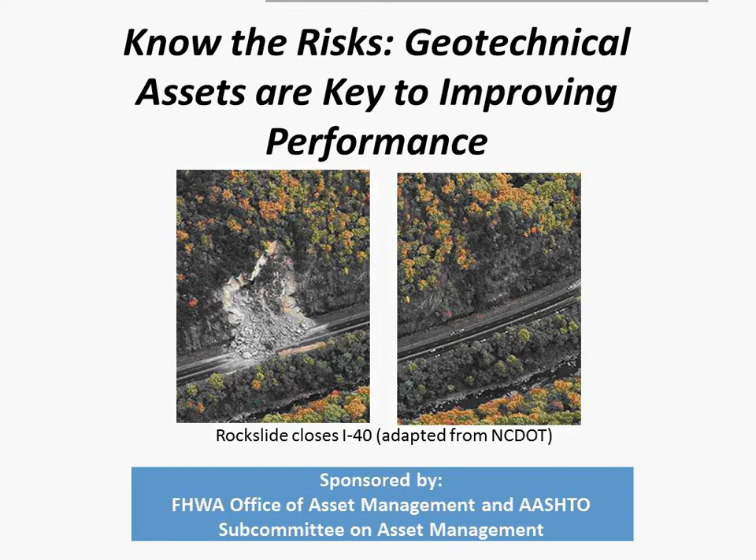This webinar, Know the Risks, Geotechnical Assets are Key to Improving Performance, is the second of two webinars on geotechnical assets and transportation asset management. These are being sponsored by both the FHWA Office of Asset Management, thanks to Steve Gaj, and also AASHTO's Subcommittee on Asset Management, which is chaired by Ananth Prasad. Vice Chair is Tim Henkel, and they're from Florida DOT and Minnesota DOT, respectively.

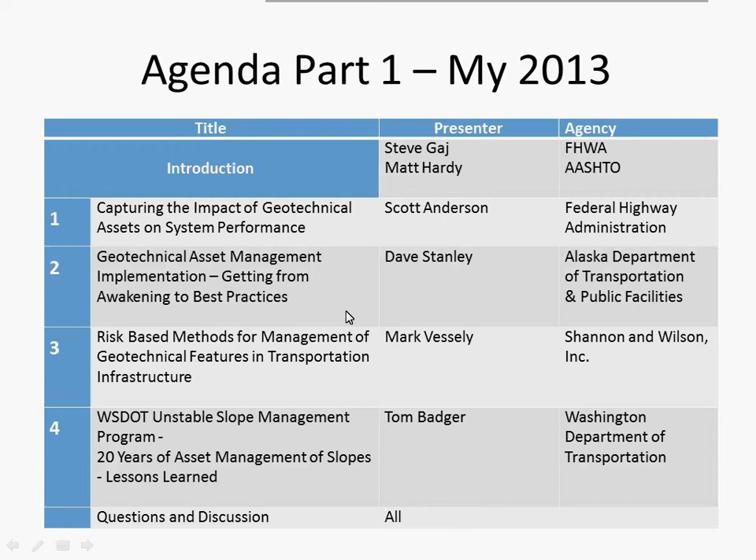So today, this is part two. We have a lot more presentations to go through today. Scott Richrath from Colorado DOT is going to provide some introductory remarks, and then Ty Ortiz, also from CDOT, is going to talk about their rockfall management system. Matt DeMarco from the FHWA Central Federal Lands has a couple presentations. Don Turner from Oregon DOT, and then Jim Higbee from Utah DOT, and we'll round it out with Ken Fishman from McMahon and Mann. So these are the about 6 or 7 presentations that we're going to go over today.

The learning objectives for this two-part webinar series: one, develop an understanding of the role of geotechnical assets in the performance of transportation systems. Learn how to consider risk and implement asset plans designed to improve performance. Listen to case study presenters share their experiences with programs for rock, soil slopes, and retaining walls, and learn what others have accomplished. And finally, learn what state DOTs and federal agencies are doing to manage their geotechnical assets.

One of the focuses of the Subcommittee on Asset Management here at AASHTO, and I think FHWA as well, is to get beyond just what we consider asset management as pavements and bridges; there are many other assets that we have to consider as well. Safety, your ITS, your technology, signs, pavement markings, all those great things. And geotechnical is another one of those asset classes that we have to consider.

we'll see a map that shows all of our rockfall sites statewide, and there's over 750 of these things that we evaluate, that we look at. And since 1996, we have mitigated only about 70 of these through our rockfall program funding. There have been other sites mitigated, perhaps as corridor or other projects that have come along for highway improvements, but specifically to rockfall, it's only been about 70 sites.

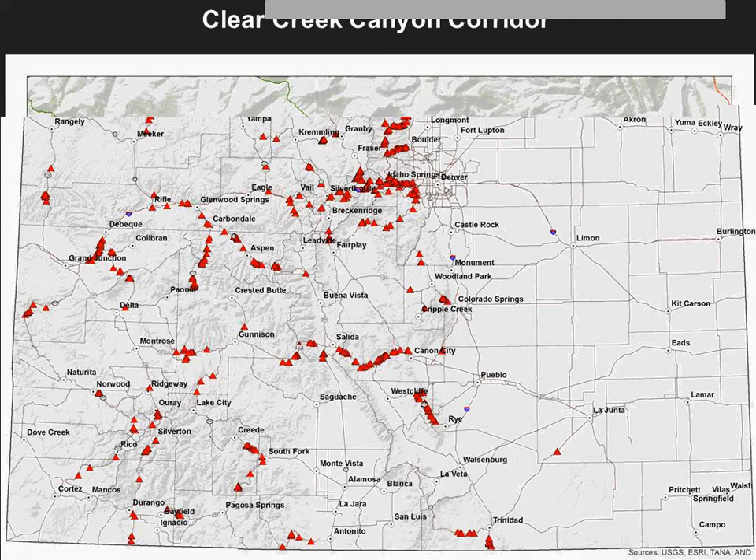And our goal here, though, was to reduce rockfall on a statewide basis, right? So obviously we've mitigated or reduced rockfall risk at that one particular site, but on a statewide basis, it didn't seem like we were very effective. And so I think the next slide gives a good example of that. This is what we would refer to as the Clear Creek Canyon Corridor. It's a corridor from Denver to one of our nearby mountain towns, Black Hawk and Central City. And there are about 50-plus sites in this location. So a good percentage of our rockfall sites are within this area.

Well, if you go to the next slide. Oh, back one. So since 1996, we've only mitigated 12 of these sites. The green dots indicate sites that have been mitigated. So just visually, you can see that over that 18 years or so, just a small portion of sites, even in this really heavily traveled corridor, have been mitigated.

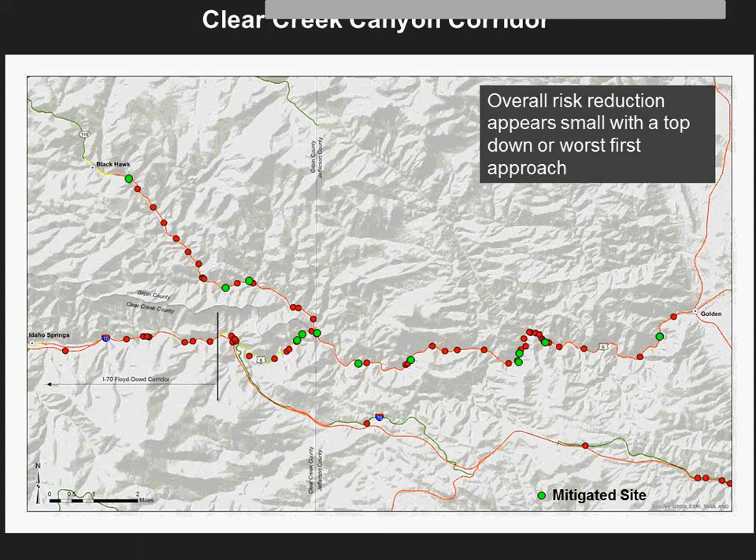And so it seemed clear that we wanted to try another approach, because we've all seen the issues that can happen when we have rockfall events. And so what we decided to do was put together a rockfall management plan rather than just a simple site-by-site rockfall mitigation plan. And so if we go to the next slide, when we put together this management plan, we put together kind of a makeshift mission, so to speak. And this was to help us stay on track, stay on goal with what we wanted to do with our plan.

And our goals were really to reduce risk on a statewide basis. And because rockfall isn't considered an asset, right? It's a hazard, but that hazard really affects the assets associated with the highway that help us to get from point A to point B. But to do that, we needed to be able to measure what we were doing. We needed to be able to measure the performance of rockfall.

And we hadn't really thought about that before. We'd gone and mitigated, but we really hadn't measured anything, partially because we didn't feel that we had data, and we had never done it before. We didn't really know how to go about measuring performance. And so go to the next slide.

What we ended up with is a rockfall management plan that really addresses three things that we do within the Colorado Rockfall program. And the primary function for us right now is to reduce risk. And once again, I'm going to keep on going back to reducing risk statewide, because that's our goal, is to reduce the rockfall risk on a statewide basis.

The other thing that we do is, as we get more and more mitigation performed, we have more and more devices that we need to manage. We need to replace fences. We need to replace barrier along the highway. We need to replace netting. And in some cases, we need to update that netting.

So to reduce the risk, and that's what we're really going to concentrate on, we wanted to take a corridor approach. We felt that if we could mitigate an entire corridor of rockfall, that would provide us a larger statewide risk reduction for rockfall. But with the same understanding that not all of our sites that have a high risk are going to fit into a corridor approach. So we wanted a method that would allow us to consider sites that were outside of corridors also.

And for those of you on the webinar, if you've not seen this photo before, there was nobody hurt here. This car was not occupied at the time that this rock fell on top of it. This particular road is pretty heavily traveled.

Yeah, I can. All right, okay. All right, I will get it. And, sorry, I got a little distraction here.

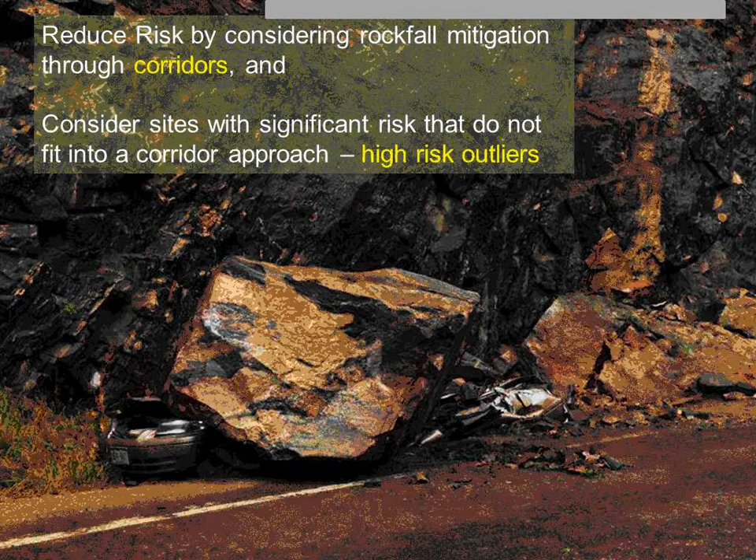But anyway, this person wasn't in this particular car when it happened, but he was parked there. It's a very widely used rock climbing area, and this was a parking location for the climbers. And so traffic, parking, all of that seemed to tell us that maybe this corridor that has a lot of traffic, has a lot of people parked there for recreational use, should be something that we give a high priority to. So if we go to the next slide,

the first thing we needed to do was divide our state into corridors. And what we have found is that within CDOT, we didn't really have a set method to delineate corridors. And so we needed someplace to start. So what we did is we just sat down with this map and we divided the state up into our rockfall sites and just used geography really, combined with our empirical experience of the mobility to get from different locations within the state.

And going back to the traffic scenario, I wanted to show a couple of examples of how traffic comes into play for us when we start to prioritize these corridors. These dots represent different sites, so I'll get to what the different colors mean here in just a minute. But if we go to the next slide, we can see a couple of

examples of traffic corridors. So this is a corridor that only has about 1,400 AADT. So it's a relatively small volume compared to other locations around the state. But this type of event that you see here, based on my experience, probably happens every 2 to 3 years. Clearly, it's a road closing event. If we go to the next slide.

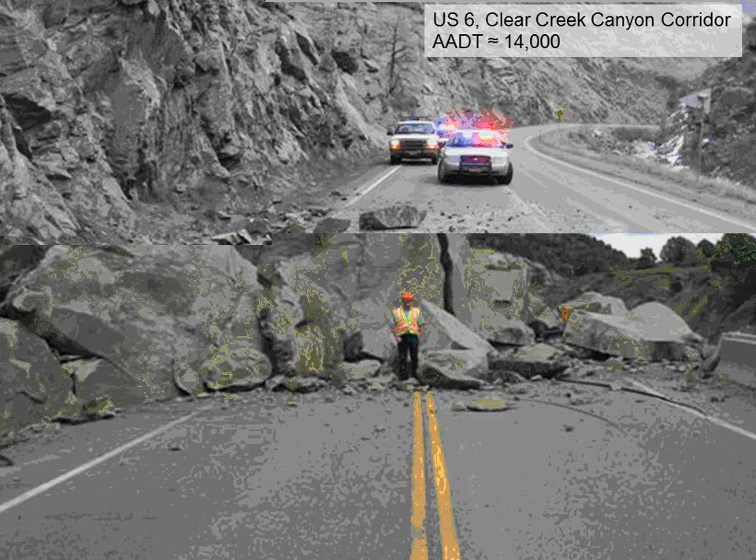So this is that same Clear Creek Canyon corridor, and it has about 10 times the amount of traffic. And so even little incidents like this will close the road just because there's so much traffic. Whenever there's rock on the road, somebody's going to hit it, and there's a bigger chance for a rock to actually land on a vehicle. And so it seems very clear to us that traffic is a big part of trying to prioritize our corridors.

And so the next slide will show the method that we use to prioritize them. We had a two-step phase. You had to make it through step one to even be considered as part of our priority. And that first one was traffic volume. And so we are using traffic as a surrogate of the consequence of rockfall.

And it seemed to make sense, right? Where we have more traffic, there's obviously a bigger consequence to the highway, but there's also a bigger consequence to the surrounding community in terms of getting people and goods and things like that to the different towns.

The second tier in prioritizing a corridor was the likelihood of a car being affected by rockfall. And we're using the term vehicle exposure here. Vehicle exposure is determined by taking data points from a rockfall hazard rating system and combining those. We use AVR, average vehicle risk, which for all intents and purposes is the percentage of time throughout the day that a car is within the rockfall zone or the rockfall hazard for that particular site.

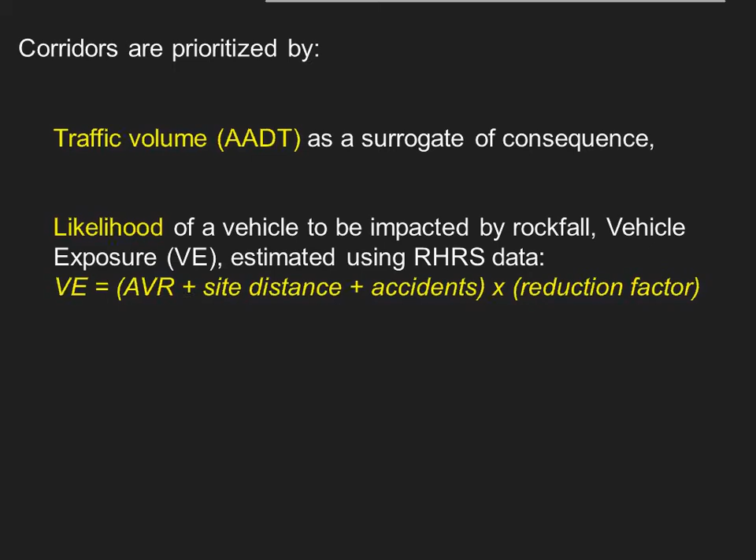So if we have a ditch that is catching 95% of our rocks, then we can reduce this. We can multiply this by 0.05 for a likelihood, because even if rock falls from the slope, the goal is really to keep it off the highway. And so the next slide kind of emphasizes vehicle exposure. What we decided to do is use this vehicle exposure component to measure the performance of rockfall, and to measure the performance of our rockfall mitigation.

So if we go to the next slide. Now that we had a method of prioritizing our rockfall corridors, that's exactly what we did. The dots that you see here, we have traffic. We use high, medium, and low traffic volumes, and high, medium, and low vehicle exposure numbers. The sites delineated with red dots are those sites that have both a high traffic count and a high vehicle exposure.

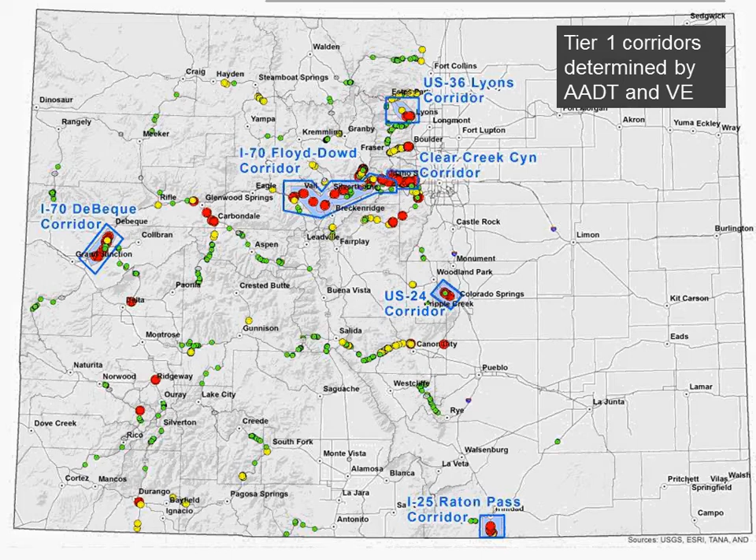And so for us, given the amount of money that we have and the time it's going to take us to work on a corridor, we right now are going with just the red dots for prioritizing our corridors. So if we go to the next slide, what that tells us is that once we have our corridors delineated, and it doesn't really show it very well in this slide, we would really stop looking at sites as individuals, and we would look at corridors as a whole.

And you can see right here our Tier 1 corridors, at least. The corridors of the rest of our state are shown here, at least on my screen, though they're not showing up. They're colored blue. You can kind of see the outline of those corridors. The thinking now is that instead of looking at individual sites, we're going to need to look at an entire corridor. And there's going to be other hazards within that corridor also.

There are going to be landslide areas. There are going to be debris flow areas. There are going to be rock slide areas, obviously rockfall areas. So you might think of this as a geologic hazard zone. And these red Tier 1 corridors are going to be where we start. Well, that still leaves us with our high-risk priorities. So if we go to the next slide.

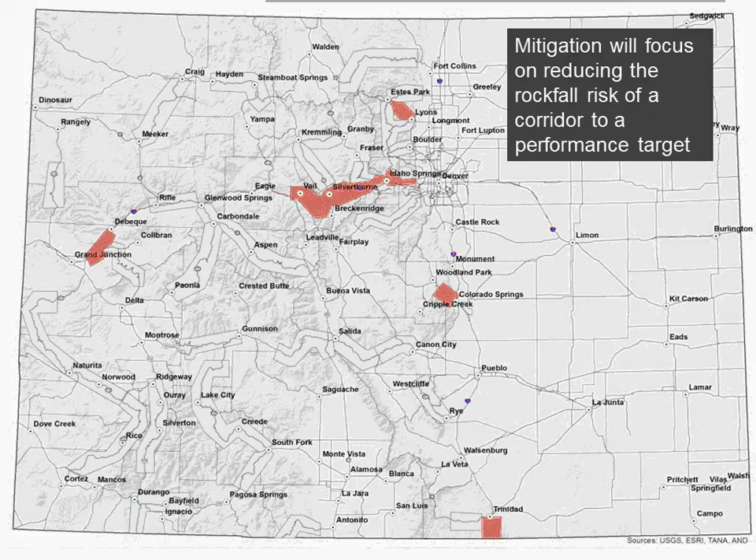Our high-risk priorities are still going to be important to us, because we understand that not everything that probably has a high risk or that we should be paying attention to fits into a Tier 1 corridor. So we're going to use a cost-benefit ratio to prioritize these high-risk sites. Along with mitigating sites through a corridor, we're also going to mitigate high-risk sites that don't fit within that corridor. The benefit will be measured by the amount of vehicle exposure reduction that mitigating one of these high-risk sites presents to the corridor.

Next slide, please. So once we have our sites delineated and we have the existing corridor vehicle exposures determined, at least an average vehicle exposure, our next steps are going to be to enter into feasibility studies for these corridors. One of the concepts that we're going to have is a mitigation confidence factor. What that's going to be is the effectiveness; I'm trying to put a number to the effectiveness of the type of mitigation. And this might be done on a broad basis, like the type of geology, or it could be done on a site-to-site basis, given the type of mitigation scenario that you might see.

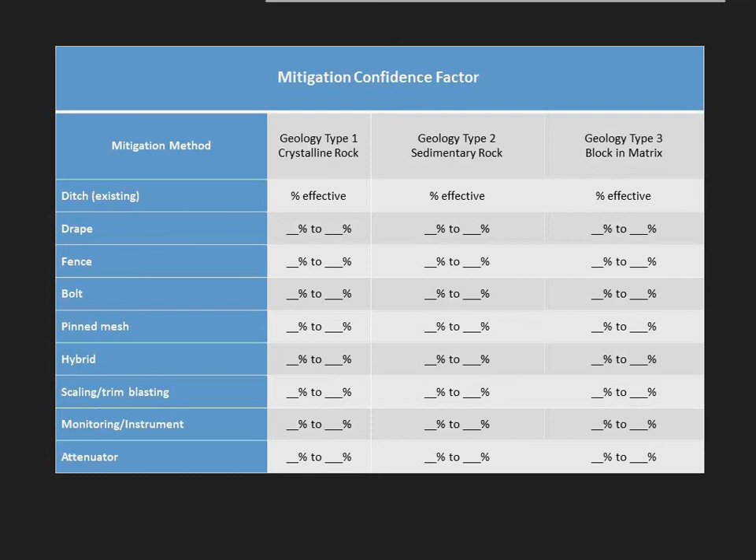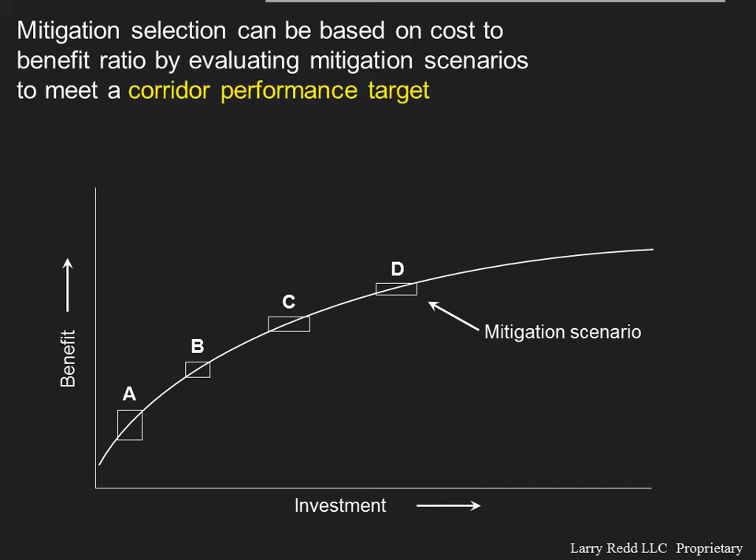So if we go to the next slide, we might start evaluating our mitigation scenarios based on a trade-off, cost-benefit or investment-to-benefit scenario. So we may have A, B, C, and D scenarios for specific sites, or for specific corridors, but the goal is going to be to perform this mitigation to a corridor performance target. Right now we don't have these corridor performance targets because we didn't feel we had enough information to provide them. So we're going to enter into these feasibility studies for our Tier 1 corridors, and at that point we will see what is an achievable performance target for us. And with the next slide, that would be the end of what I have to show for what we're doing in Colorado for rockfall.

All right, can you hear me? Yep.

Okay, this is Matt DeMarco. I head up the Geotechnical section of Central Federal Lands Highway Division of FHWA out of Denver. I'm going to talk about an engineered slope management program that we kicked off at Yosemite National Park back in the summer of 2011. It dovetails very well with what Ty was just talking about and has some elements of his statewide program in a much smaller area, so I think it will align well with what you just heard.

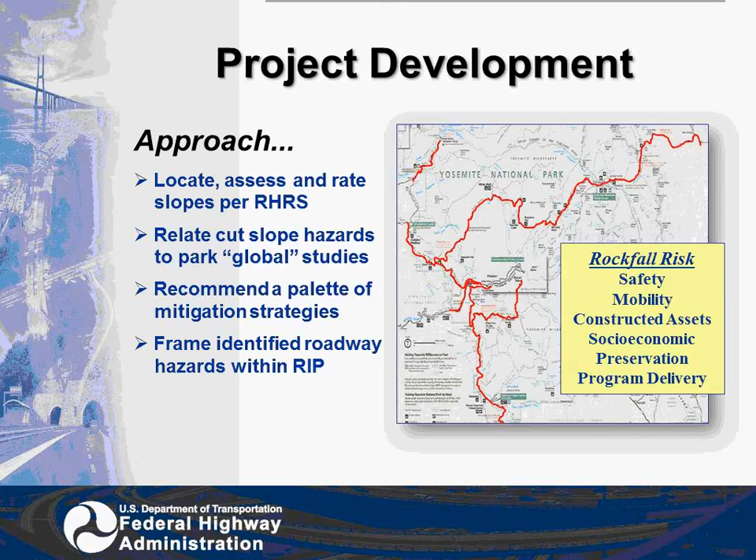Rockfall has been an issue in the park for decades and has been studied by U.S. Geological Surveys well over the last 30 years. In April of last year, the park geologist Greg Stock, along with USGS and others, published a risk assessment for major rockfall that had been occurring in Yosemite Valley. This is an excellent publication, and you can access this very easily by simply Googling Yosemite rockfall, and it'll come up with this document.

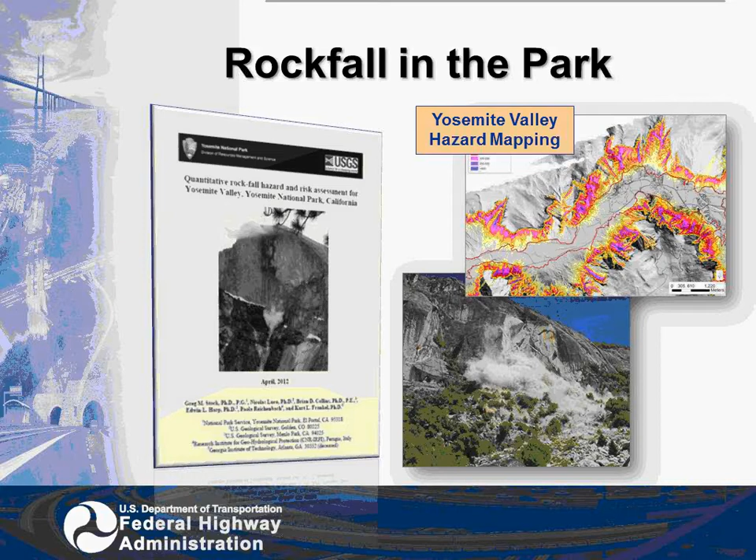In the upper right photo there that shows the plan view aerial, you'll see a thin red line. That was a hazard line or a risk line that was established for the park based on this analysis that is now being used to drive policy on decommissioning some camping areas and actually removing some of the residence headquarters within the park. Next slide.

I should have mentioned, too, that I think it was because of that more global study that's been ongoing within the valley that the park really understood the value of rockfall management and understood where we wanted to go with the engineered slope management program, and so it was an easy sell.

As I mentioned, we use the rockfall hazard rating system as our basis for our work. It's a hazard assessment. It has some risk attributes to it, not a true risk measurement program by any stretch, but easy to apply. It does provide a basis for funding prioritization, though it could be misused in a worst first kind of context, and we'll talk a little bit about that.

Our deployment was pretty traditional with a preliminary screening of over 300 slopes on the park roads. We wound up conducting a rating assessment of 163 of those cuts. And then we followed up some months later with a windshield survey that involved all of the maintenance staff traveling all the roadways. When you're out on the ground collecting this information, you get this snapshot in time of performance, but you don't get a sense of how the cuts are performing seasonally.

And so we just did a very simple 1 through 5, kind of hold up a finger as we drove by, as to how serious a rockfall issue each of these sites were. It lined up very well with the RHRS survey. Next slide, please.

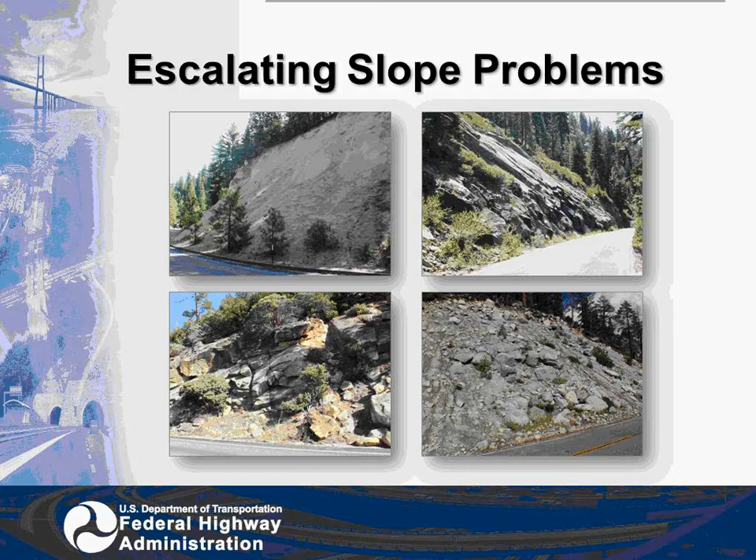So over the course of the work, 163 cuts were rated. We looked at how the ratings were falling out, and just very simply did a quick distribution of the types of remediation actions that needed to be done to each of these slopes. To have a very simple conversation with park engineering and maintenance staff, we broke them into 150 rating point increments, and then classified them low, medium, high, and very high. Again, this aligned very well with the windshield survey. Next slide.

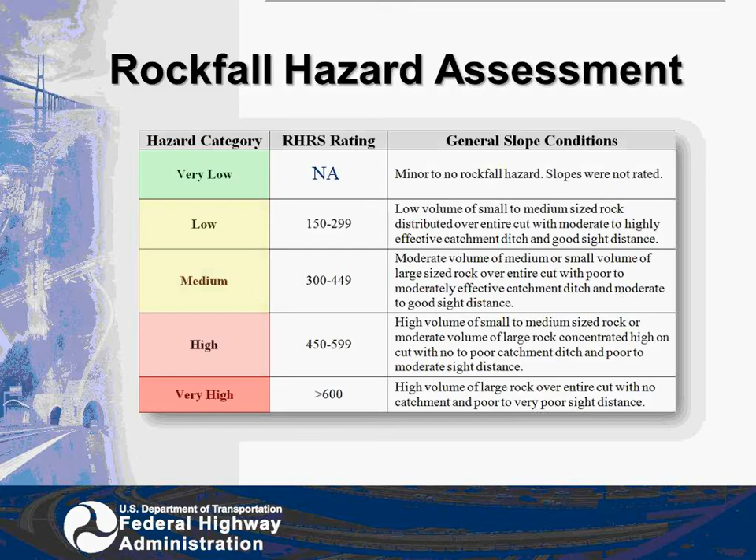You can see the distribution of how those ranked out. The very low were excluded in the original screening, so the 163 ranked from very high to low. 85% of the slopes ranked medium or lower, and we only had 15% that ranked in the high category.

And this would have been where I think traditionally, from a programming standpoint, we would have said, okay, let's go out and start doing the engineering on what appears to be our highest risk, 2%, maybe breaking into that 13% in the high category, and get our out-year funding in place so we can go to work and fix 3 or 4 slopes at a time.

Very similar to what Ty showed on the Clear Creek example with having attacked a handful of the higher risk slopes, a few at a time. The conversation that we wanted to have with the park at this time and pursued was, let's take a look at, and could you go to the next slide, please, is rather than jump to the conclusion of attacking high-risk slopes, what is it that we really want to pursue over the next 5, 10, 20 years?

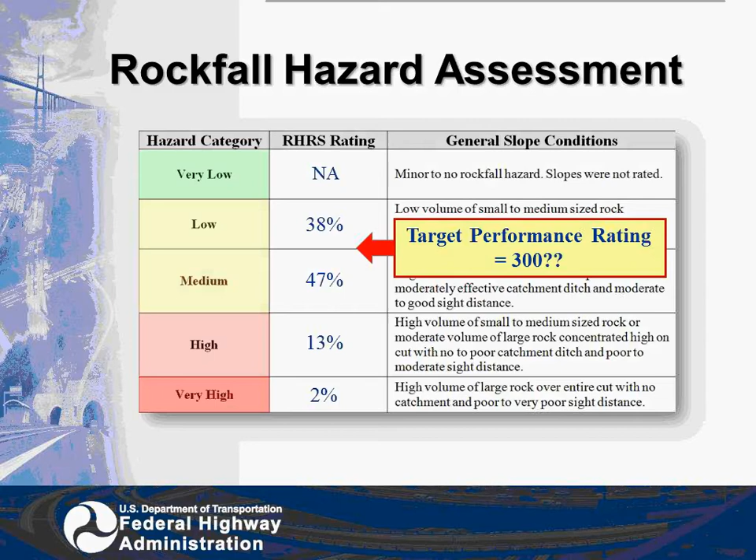And is it possible for us to set some sort of target performance rating for within the park? And when we looked at the maintenance requirements and the mitigation measures, there's kind of a natural break around that 300 RHRS rating. We said, well, is this a good target for us? Can we reach that, giving due consideration to a number of factors? And let's look at the next slide, please.

And some of those considerations have to do with immediate funding. You know, what monies do we have in pocket right now that we can apply to imminent hazards within the park? Where are we going with program funding in the park? We have highway work, roadway work scheduled for the next 9 years in the park. How can we leverage those funds towards a broader program? Is there a cost-benefit consideration that we need to give to treating a larger volume of slopes as opposed to focusing in on some of the larger, higher-risk slopes?

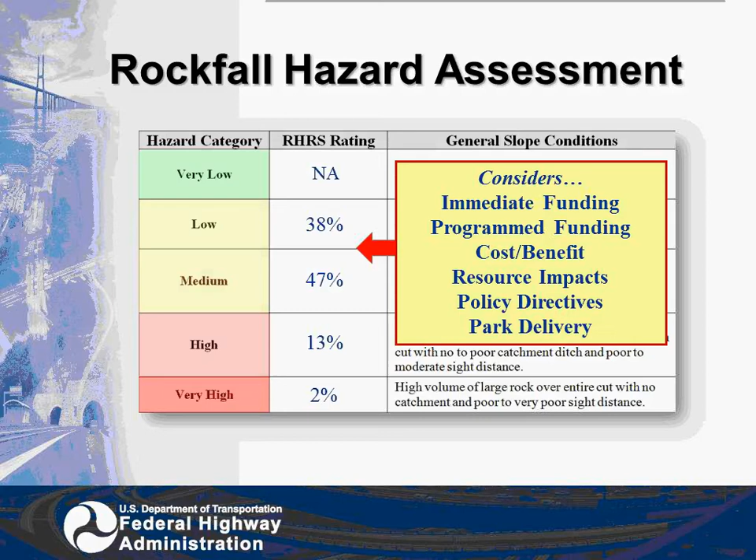And then a couple of issues that the park has to address on resource impacts and policy directives. The park, of course, with the Yosemite Valley issues, has come up with substantial policy regarding rockfall, and so we have to align our work within those policies. And then the bottom one here on park delivery. With sequestration, a number of people have been laid off from the park, and so there was a big push that perhaps the park could deliver some of this work. And so we can go on to the next slide, please.

So we came up with a 3-phase program aimed at addressing those types of considerations. In the first phase, that actually kicked off just this morning in the park, we called hanger removal. And it has to go back to, and again, I think Ty just talked a little bit about going back and looking at the highest risk locations in the state. The question came up in the park that if we wanted to allocate several $100,000 to try to drive medium-rated slopes into the low-rated, where we're treating maybe 80 slopes as opposed to 2 or 3 slopes, are we ignoring imminent hazards and dangers within the park?

And what doesn't come out in the rating system is these sites that have imminent hazards. And so in this particular case, which is on Wawona Road, which is the first road they're starting on this morning, you can see that this slope doesn't really have much of a rockfall hazard related to it outside of this one boulder that's perched up at the top of the hill and is just hung by a tree root.

So we took a step back and said, you know, for a couple $100,000 and putting park staff to work, we can go to a lot of the slopes immediately this year and not have to wait for program funds out here and make a positive impact on safety throughout the park immediately with the skill set that they have. Next slide, please.

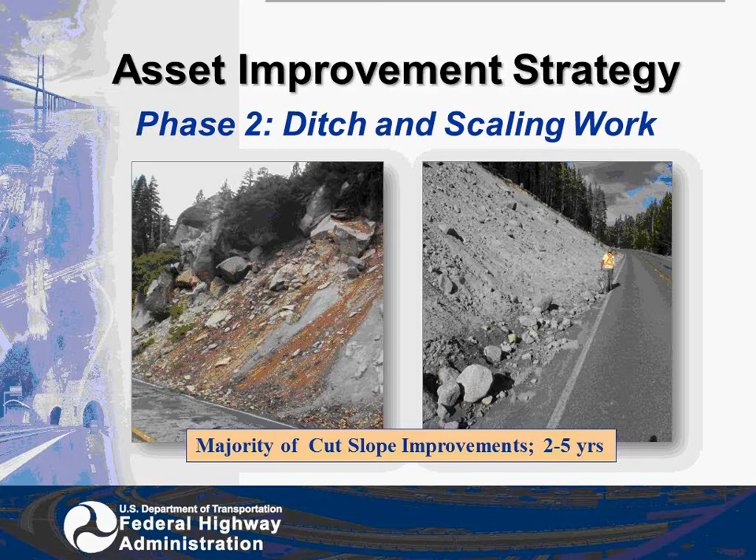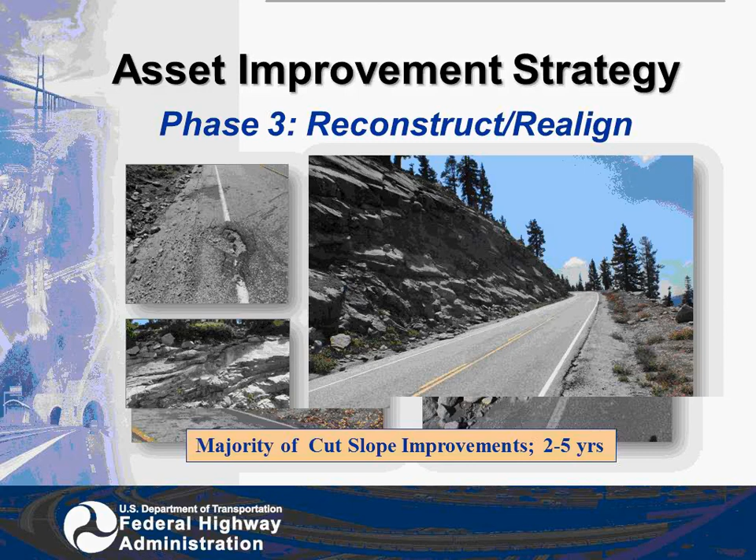And then finally, for the very high-risk slopes, the engineering programming will start later this year, looking at major rehabilitation, reconstruction, realignment of roadways. The large photo that you see here has plenty of room to move this road out onto the shoulder, and this is programmed for 4 years from now. Get us away from having to do any type of rock treatment up here.

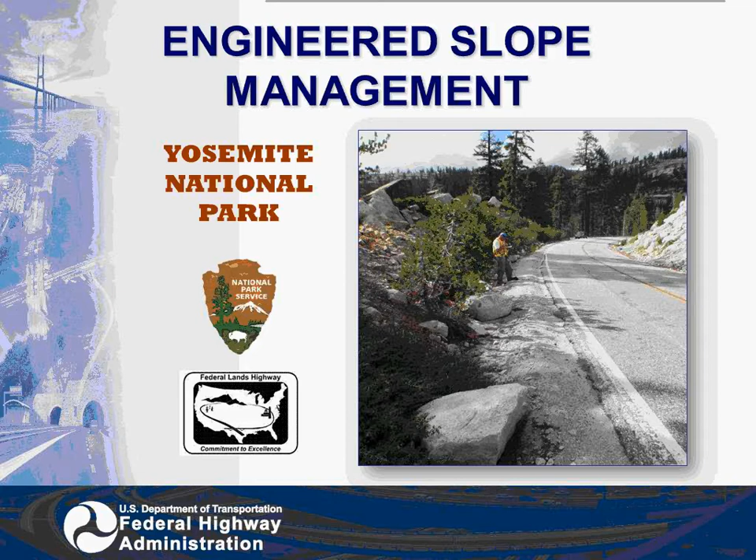Next slide. So in closing, I'll just say that it's pretty rudimentary. A first start at changing a paradigm within the park on managing rock hazards with a proactive approach, and also beginning the first steps of incorporating this subject into their asset management program park-wide.

And I'll just say also that Mark Vessely spoke in May about geotechnical asset management. I think he made reference to the new document that came out of Central Federal Lands on implementation concepts and strategies. And I just would say that this is now available. It's new this year, and some of these same subjects are covered in there as well. And you can Google geotechnical asset management, and this will come right up.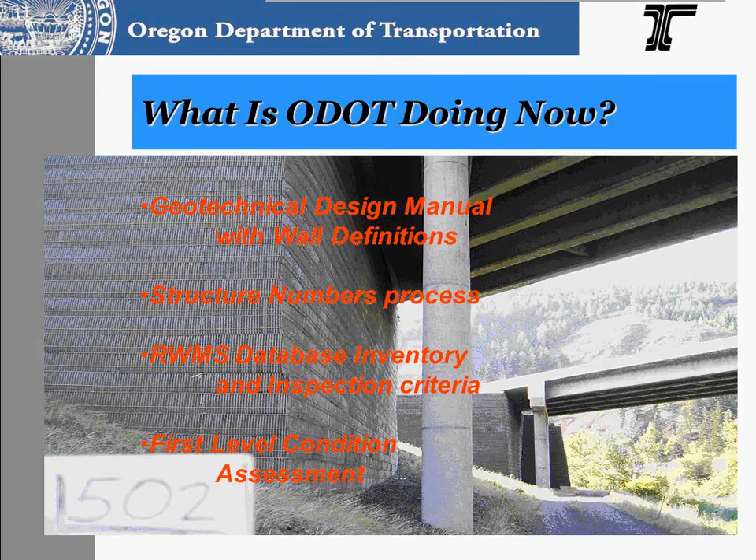We have a retaining wall management system database that we've collected, and we developed the beginnings of an inspection criteria for that and incorporated it into the database. And then, as part of the inspection criteria, we developed a first level condition assessment. So basically looking at the wall, seeing if it's performing as it needs to, and then developing further criteria after that. Next slide, please.

Some of the definitions: we have defined bridge retaining walls, anything that supports a bridge end or is close to the bridge, as opposed to, in this case, a highway retaining wall, which is separated from a bridge and is standalone. They can be MSE, they can be tieback walls, anything else that is standing alone. Next slide, please.

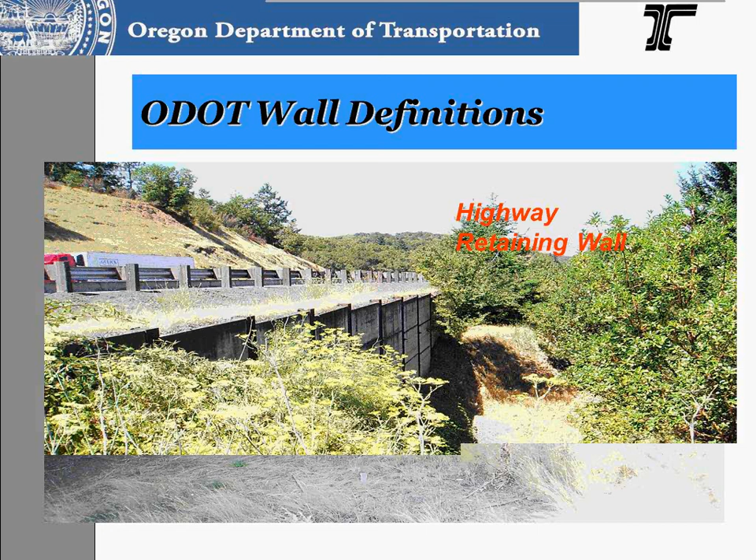Part of our process that we developed was to collect information in the office from existing as-constructed plans, going through each plan set and trying to determine what the intent of the design was at the time. This could go back 50, 60 years, so sometimes it's quite difficult.

Anytime we see a wall in those plan sets, we incorporate it into our database as a database record. We used all that information coming from the plans to get a type, size, and location of the wall. And then we follow that up with a field verification of each wall and try to do a first level condition of that wall. That's an ongoing process we're into right now.

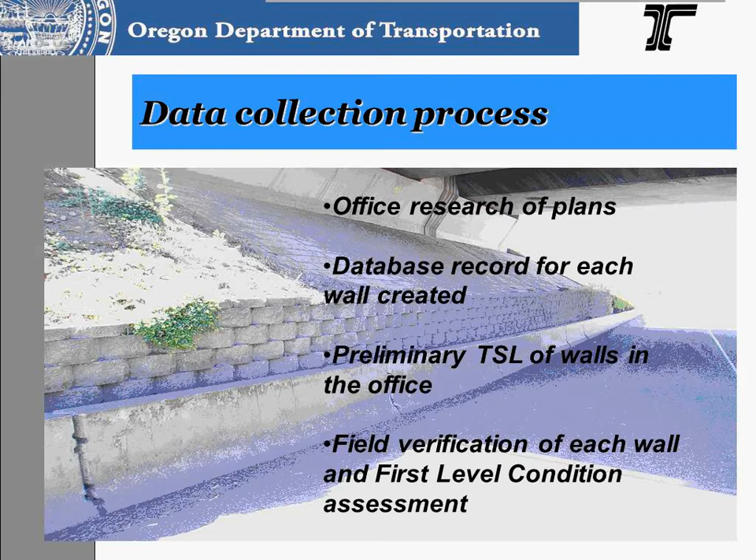Next slide, please. The database itself was developed using the National Bridge Inventory coding field and Pontis data, so that we could tie all of the information directly into our bridge section. Because so many walls are part of the bridge prism, we wanted to make sure that we weren't recreating something separate from our bridge section. We also used the Colorado DOT feasibility paper by Hearn, which used Pontis type information, and then the FHWA circular on earth retaining structures. Next slide, please.

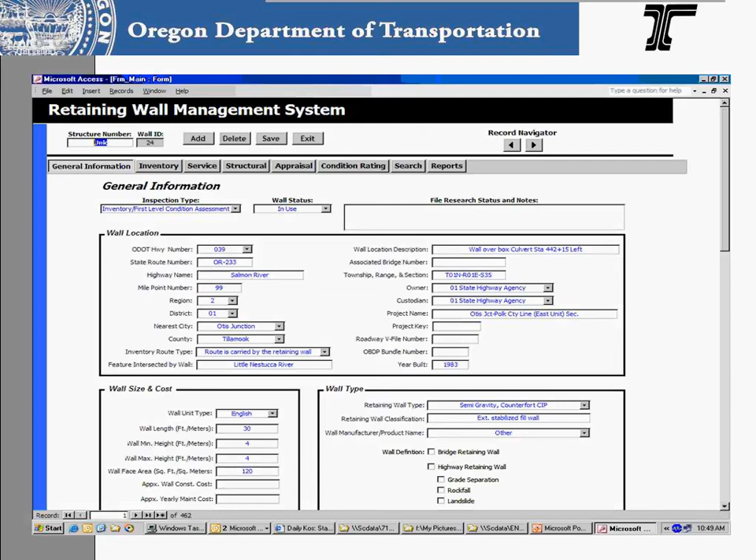This is just a screenshot of our first page of our database. It's probably too small to read, but it just shows that there's a lot of information that you can gain out of a set of plans just to get a type, size, and location. Just basic information, and gives you an idea then of where to get started. Next slide, please.

The condition rating is probably the more difficult thing to do at this point. There's no standard yet on condition ratings for walls, other than what our bridge inspection folks use to inspect bridges and abutments and those kind of things. So what we developed is a simplified version, what we call a total element score.

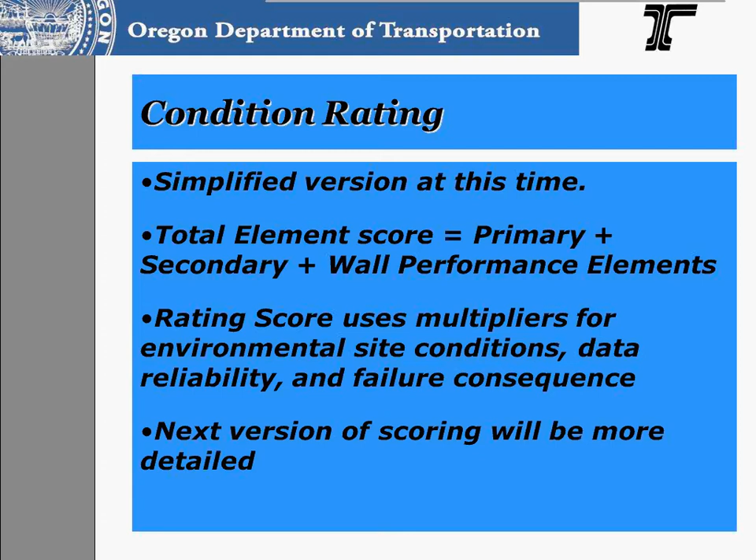We use what we call primary elements, and the primary element of a wall is the face. It's the only thing you can really see of a retaining wall, so that's the primary element. Secondary elements are anything that surrounds the wall. And then we have performance elements. The rating score uses a bunch of multipliers to try and help out how good the data is, and we're planning on improving all this as time goes on. Next slide, please.

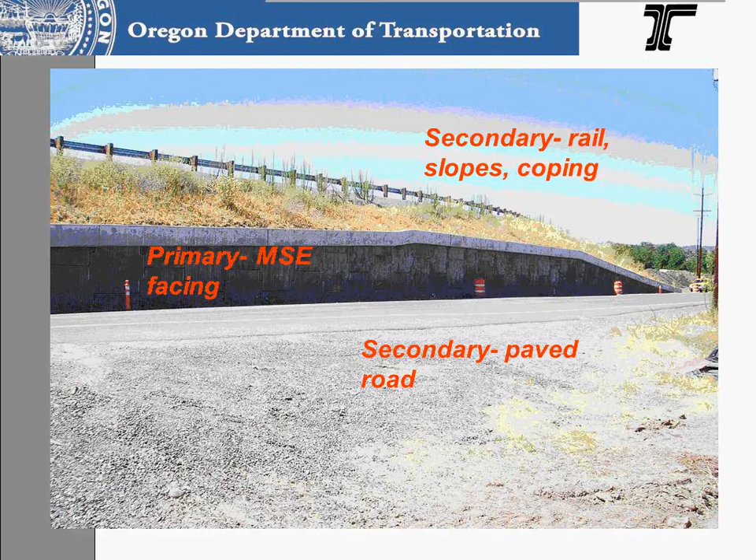We have about 2,100 bridge and highway walls in ODOT. About 60% of the walls we have now constructed are MSE. By that I mean, I don't want to confuse it, walls that are now being built. Years past it was more cantilever. Now most walls are MSE type. About 10% of walls now being built are cantilever. About 70% of all the walls that are built are part of a bridge. And 90% of walls that we have are under 30 feet high.

Next slide. So what have we learned so far? Our design information can be very scattered. We have to go to bridge files. We have to go to our archive as-constructed plans. Sometimes project manager files contain information that isn't in the plans.

Another thing that came up in later years, we started giving contractors the option of several different types of walls to build. So the plans probably didn't show what was actually built. So that means we have to go out in the field and look and see if we can determine what that wall might have been. As-constructed plans, older plans are different from newer plans in how much information was incorporated.

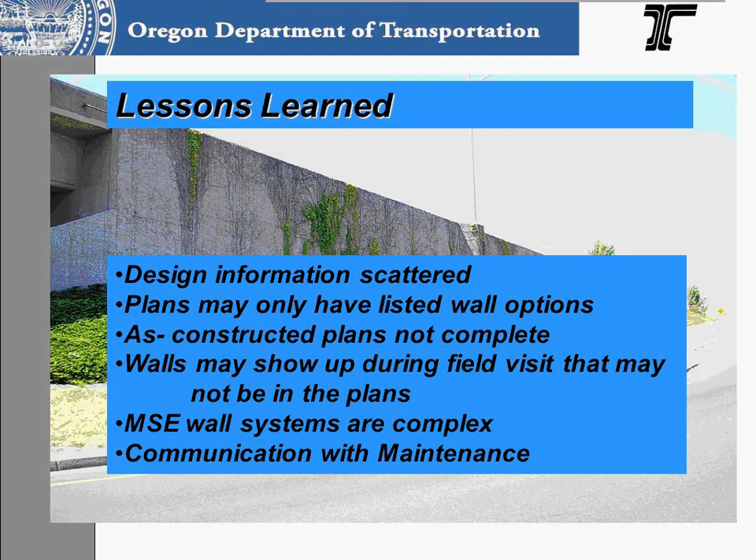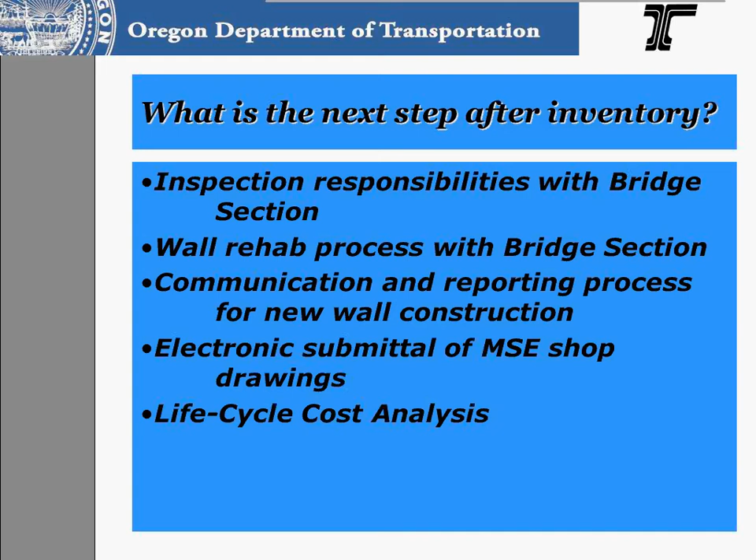What's the next step? We're going to be developing inspection responsibilities with our bridge section to work with our bridge inspectors. We have to develop wall rehab procedures for different types of walls. An MSE wall would require something different than a tieback wall. A communication and reporting process for new wall construction, and some sort of process for electronic submittal of shop drawings. After that, we need to have some sort of a life cycle cost analysis method developed.

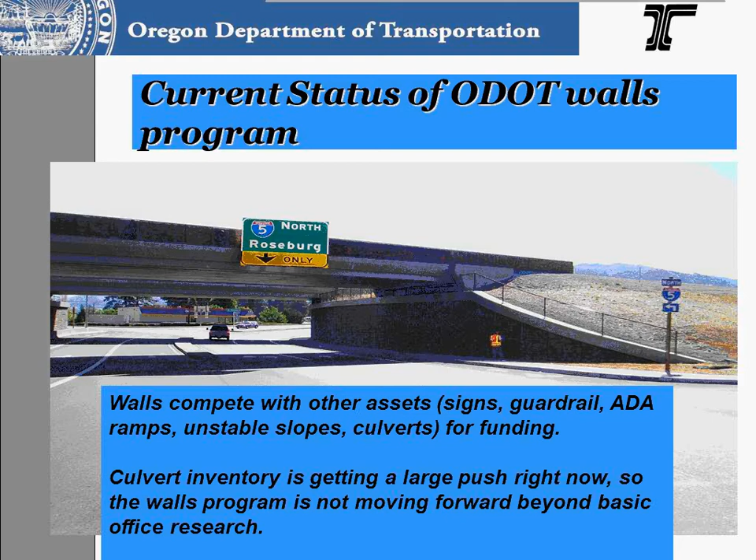Next slide, please. So at present, our wall program competes with other assets, signs, guardrail, ADA ramps, slopes, culverts, for funding. At this point, culvert inventory is getting most of the funding, and so our walls program is moving slowly forward in just trying to develop one piece at a time. And if we can get more funding, we'll work on it in a faster method. And that's all I have.

I'm going to talk about our UDOT retaining wall inventory inspection asset management program, which is still in its infancy for us. In talking with Dave Stanley over the last few years, and with Don here last Friday, I've come to realize that we at UDOT have really had a leg up in terms of our starting point for developing an effective asset management program for our state's retaining walls. This is from two main aspects.

The first being about 15 years ago, our Structures Division adopted a wall numbering system, but like other states that started similar numbering systems years ago, our folks began to assign numbers somewhat haphazardly for things that had nothing to do with retaining walls. After a few years, they refined the process to assign them only to walls, and more recently, they've adopted an efficient email system for project designers to formally request the wall numbers, while giving us more definitive background info on the walls.

The numbering is currently up to about 740, but we certainly have a lot more walls in the state than that. The main reason is that we've generally followed the numbering process that only one wall number is assigned for all the walls of a particular type on a project, or for a project phase where that applies for our larger projects. So, for instance, on the Legacy Parkway project located north of the Salt Lake Valley, which was completed in 2008, there were only 3 wall numbers for all 40-some-odd single-stage MSE walls for each of the 3 project segments, and 2 numbers for the 2-stage walls on the 2 wall segments.

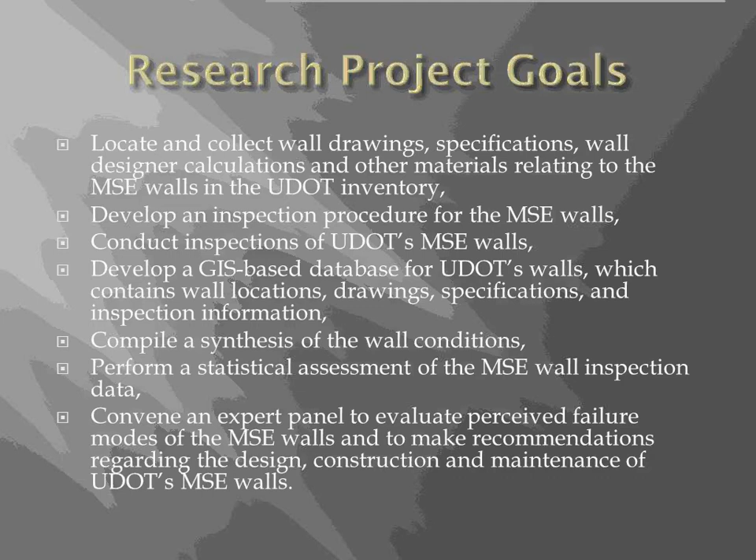to perform a statistical assessment of the wall inspection data, and lastly, to convene an expert panel to evaluate perceived failure modes of our MSE walls, and to make recommendations regarding the design, construction, and maintenance of them. So beginning under watchful care of Blaine Leonard and our research division, and continuing with David Stevens, they conducted this project over a nearly 3-year span.

They got bogged down at a couple of points. They did a pretty good job in wrapping it up in the fall of 2009. Due to some logistical issues, we haven't been able to get a final report yet, so I can't forward that around to anybody yet. But we hope to be able to share it at some point with our GAM committee and other interested people.

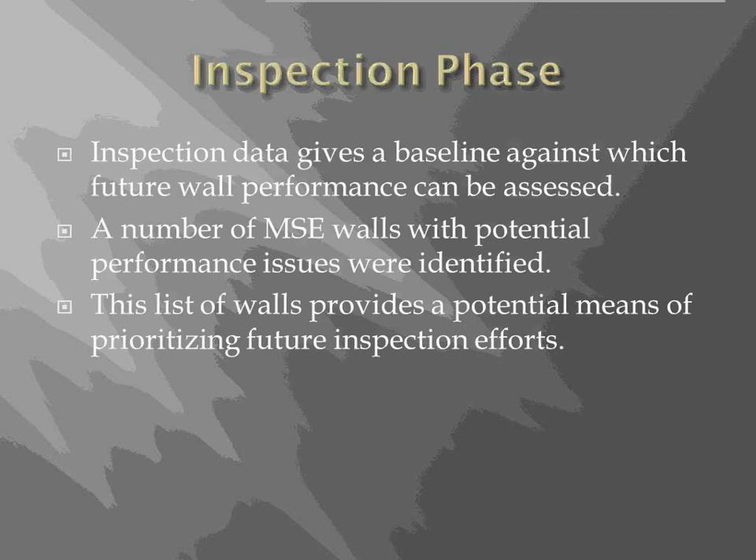So then the inspection phase, the inspection data gives us a baseline against which future wall performance can be assessed. In analyzing the data, a number of MSE walls with potential performance issues were identified. So this list of problem walls that we have, we hope will provide us with a potential means of prioritizing future inspection efforts when resources are limited, as they are for most everyone.

Next slide. As a background for the research team, we provided them with information we have gathered concerning a few of our problem walls. And here's just a couple of quick examples. In the town of Clearfield, Utah, we had an MSE wall abutment, and we had abutment walls around multiple railroad tracks that experienced several modes of failure, including undermining and displacement of the wall leveling pads, vertical separation between the wall panels, rotation of the panels with accompanying spalling of several panel corners, outward rotation of the top wall panels and coping, and cracking of the coping, and so forth.

And then about 4 years ago, after completion of the $1.6 billion I-15 reconstruction project through Salt Lake, we saw some buckling of MSE wall panels for these 600 North bridge abutment walls, which were two-stage walls designed by the now assimilated VSL Wall Company. They used a welded wire mesh reinforcement grid with the facing panels attached to the mesh by turnbuckles.

When we inspected the back of the panels, we saw that corrosion had deteriorated one of the connections between the panel and the turnbuckle. So we theorized that the corrosion of the connection allowed the panel to lose rotational restraint and buckle. And we repaired the worst spot right here with a CIP concrete section.

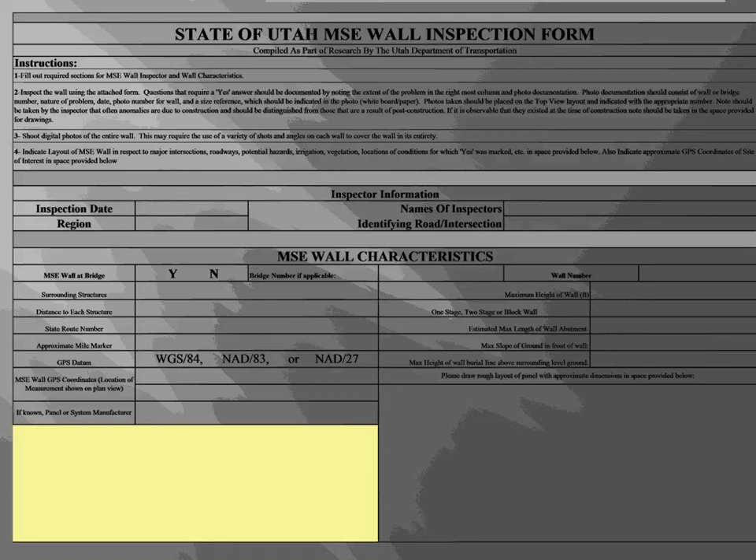Next. So the 2 research inspection teams from USU and BYU did their statewide wall inspections in the summer of 2007. Next. They developed a very comprehensive inspection form and procedures with sections on the wall inspector and general wall info, summary of key observations, plan and drainage views, cross-sections, and specific wall characteristics. I don't know if you can read a lot of that, particularly on the right side. It's pretty dark here. But I'll briefly show you a few of the situations that they uncovered in their inspections.

This is one of my oversight projects in beautiful Logan Canyon. We have eroded backfill and exposed geogrid reinforcement due to the poor surface drainage design. They came across that one. Next one. We like our walls to be self-drained, but this is ridiculous. There was a storm drain connection issue for the abutment wall west of I-15 in Salt Lake here, where the designers unwisely put the drainage right through the MSE reinforced zone, which we know is something we very much want to avoid.

Looks like we were cut off on the bottom side here on our slide, at least. Sorry about that.

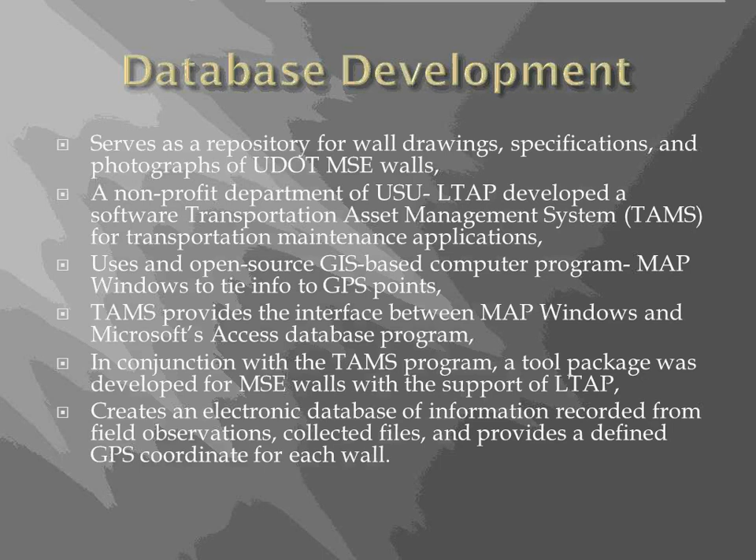So for our database, I won't talk much about all the details that you can read here for yourself, but suffice it to say we had a GIS-based database, and it used the MS Access program for its platform, and it seemed to work pretty well for them. Next slide when you want to.

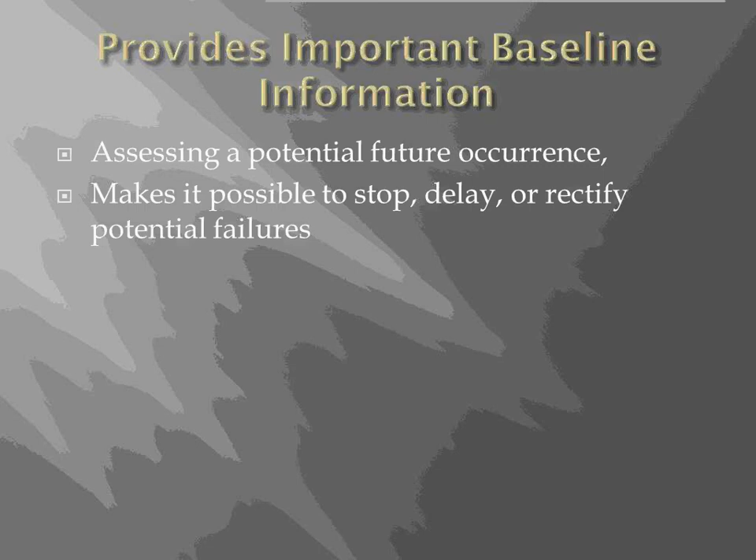Having a database system to retain your drawings and specs, inspection reports, and photographs and so forth, that becomes critical when you're assessing a potential future occurrence of a poor wall performance or a failure. Your previous inspections can also provide a baseline of MSE wall conditions against which you can assess your future conditions.

But without baseline information, for example, it might be hard to assess whether cracking in a wall occurred during construction and is no longer a concern, or whether cracking is the result of an active mechanism, which is continuing to degrade the wall's integrity. But with proper documentation of the wall's behavior and its design and construction, it's possible to stop, delay, or rectify potential problems before they reach a critical point.

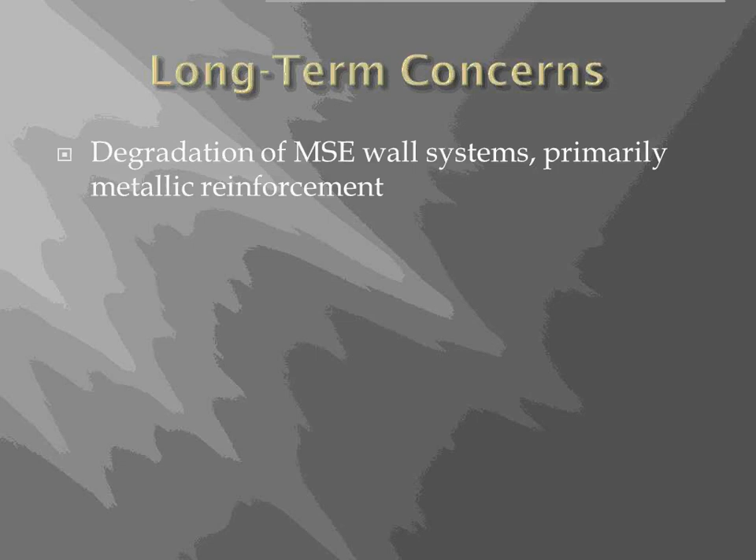The short-term concerns focused on wall drainage, wall design, details and specs, and the retention of our wall information, but the long-term concerns focus mainly on the degradation of MSE wall systems, primarily the metallic reinforcement, as Ken Fishman's going to talk about here.

So where have we gone, and where are we going from here? With this strong starting point, we didn't want to let a potentially very good wall asset management program drop away from us. So in December of 2010, 2.5 years ago, we prepared an action plan with proposed funding options for our structures management to take before our Utah Transportation Commission. Things didn't go as well as we'd hoped for at that point, so we've been in a holding pattern since then.

But recently, in preparation for this presentation, I contacted one of our managers and asked for his general feelings on helping us move the program forward. He replied to me back last week with a general but good statement of support. So we're optimistic, I think, that we can get our program going in the not-too-distant future.

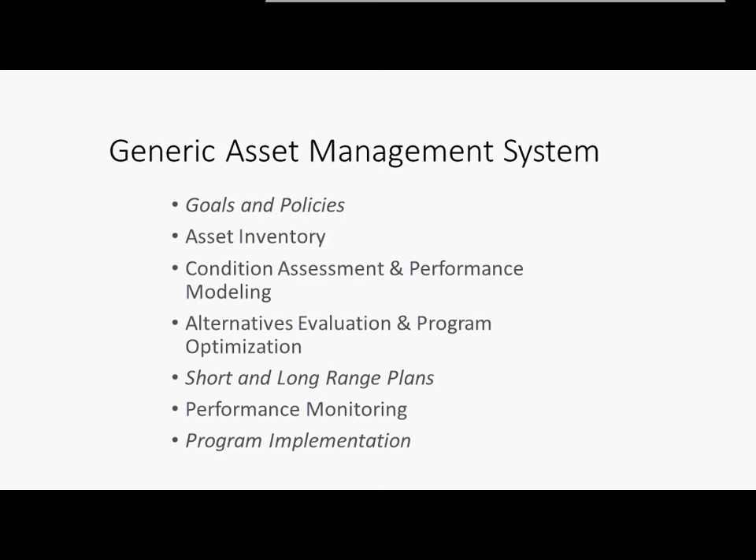I mean, they're either trying to improve safety, improve efficiency, lower cost, but we have to be sure that the data that we're collecting and the way that we are interpreting it is actually going to feed into the system such that we can check and see how these goals are being achieved, if they are indeed being achieved. And then finally, once we collect the information, it has to be passed back up the line, so to speak, to those people that are going to be making decisions, etc., based on this data. Next slide, please.

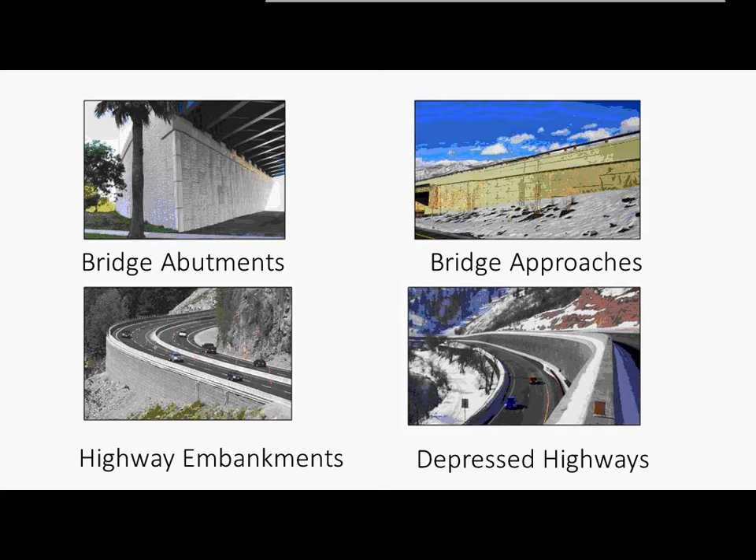These systems do prevail throughout highway systems in a number of different applications. Next slide, please. That do include bridge abutments, bridge approaches, highway embankments, depressed highways, etc. And as you can see from these photographs, these can be rather substantial structures, and the performance, durability, serviceability of these elements do indeed affect the performance of the entire system.

Next slide, please. In terms of performance, it helps to look and see what these walls' different components are, but essentially in an MSE wall, we usually have a relatively light, often precast concrete panel, set of panels that are articulated and form the face of the wall. These panels have connections to reinforcements that are actually embedded in fill as the wall is placed. And the soil that makes up the wall fill, as well as the reinforcements, are also very important components of

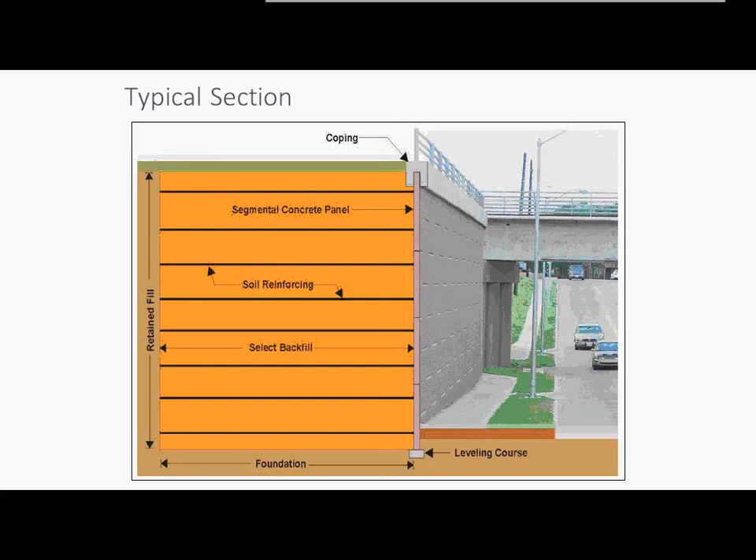the system. And some of the issues that might come up might be related to the wall face itself, might be related to some erosion or drainage problems, as Don and Jim were discussing, as well as the performance of the reinforcements themselves. And what I'm going to focus on, because others have talked about some of these other issues, is really the performance of one particular element, which would be the reinforcements. Next slide, please.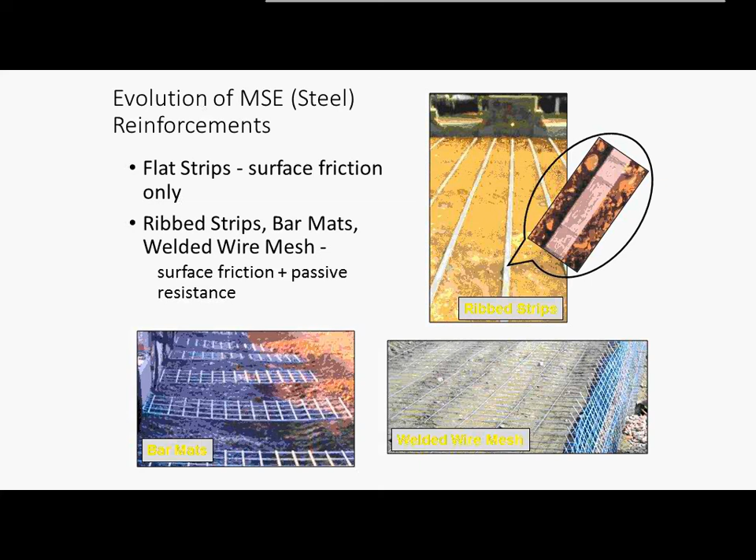But it's also possible to have a wire-faced wall, which is what we're seeing in the lower right photo, where rather than having precast panels constructed as part of the system, the wall facing is actually a wire face as well. So you have a wire mat for reinforcement and then a wire face that's bent up and actually reinforced with a backing mat often towards the face. So in fact, the whole structure is actually a metal wall. Next slide, please.

The reinforcement performance is affected very strongly by the character of the wall fill. The wall fill is specified and has to meet certain requirements in terms of gradation. And these are intended to give you the strength as well as the permeability that you need for the fill material. And often, particularly with metallic reinforcements, the wall fill has to meet certain electrochemical requirements to try to mitigate the potential for corrosion and other issues that might affect the durability of the metal reinforcement. So we try to limit the pH, the resistivity, as well as the salt content of the wall fill.

And as long as you meet those criteria, what we've seen is the performance of metal reinforcements within different fill types has really been quite good. In fact, usually it's better than what we assume in design. So one of the points that I want to make with this presentation is when we're looking and studying performance, it doesn't help to only look at bad performance. We can certainly find examples of bad performance. They abound in the literature. Usually, or always, this has been attributed to some poor quality backfill that has been used, and in fact should not have been used to construct the wall.

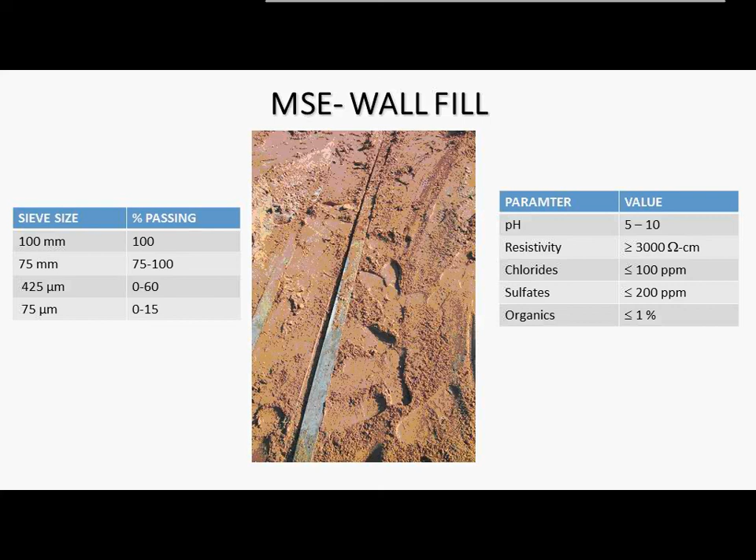But there's also a vast amount of data that shows relatively good performance. So I think this is some good news that can be used by asset managers, and I think that when you're collecting data and trying to analyze it, you have to be careful not to only look at the bad cases. You have to look at performance as a whole and try to distinguish between good and bad behavior and group them accordingly. Next slide, please.

There are two main documents that I'm really going to speak from. The first document that you're seeing is this FHWA document, Corrosion/Degradation of Soil Reinforcements for Mechanically Stabilized Earth Walls and Slopes. It has been around for a while. The first version of this came out in 1990. It was written by a guy named Victor Elias. And that first came out with a procedure, a number of techniques that can be used for condition assessments of these reinforcements.

So a lot of the techniques that we're using for measurements are really coming out of this document. And at this point in time, these measurement techniques that we're using are really considered to be mature technologies. So we're no longer looking at trying to improve the measurement technique itself, but more looking at how to process and interpret the data that we're getting from these measurements.

The second document is much more general, and it just recently came out. I think it came out towards the end of 2012, and this is an NCHRP synthesis that was actually written by one of the researchers that Jim Higbee just mentioned, Travis Gerber from Utah. And I think basically this synthesis is a takeoff on what he did in Utah, describing their asset management program

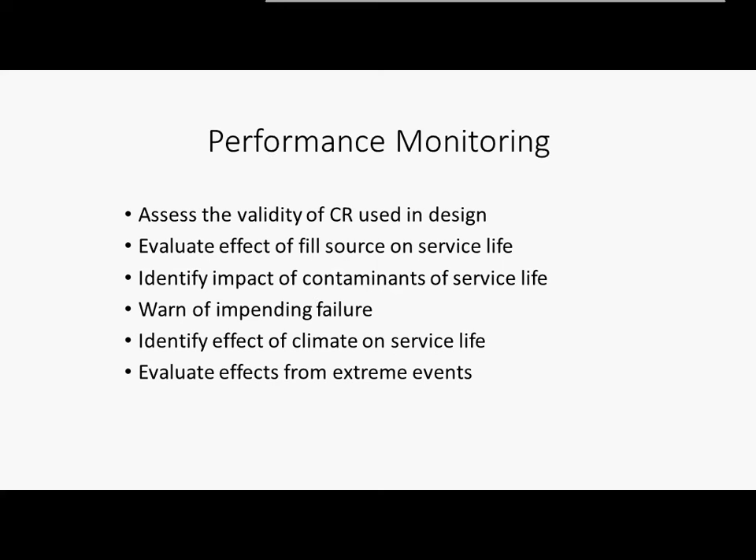But there are certainly a lot of other aspects of performance monitoring that can be used to address problems as far as identifying where your best fill sources are, what's the effect from extreme events, flooding, etc., on the performance of these walls. Can we get some warning if we have an impending failure, and several other things. But I think in terms of asset management, right now we're kind of most interested in looking at the corrosion rates that we use in design and how these compare to what we're seeing.

Next slide, please. There are two real general categories of ways to assess condition and measure corrosion rates. One is direct observations, which is the way it's been done since the early days when the suppliers were coming up with documentation and research to support the durability of their product and the corrosion rates that they were recommending to use in design. But essentially, these were often weight loss measurements or loss of thickness or strength measurements.

We actually had to retrieve a sample, test it once, and get an answer, and then that sample is no good for further testing. You have to go back and retrieve another sample that may or may not be performing the same. But since the 90s, we have been implementing electrochemical tests, which are more of a non-destructive type of test in order to measure corrosion rates directly.

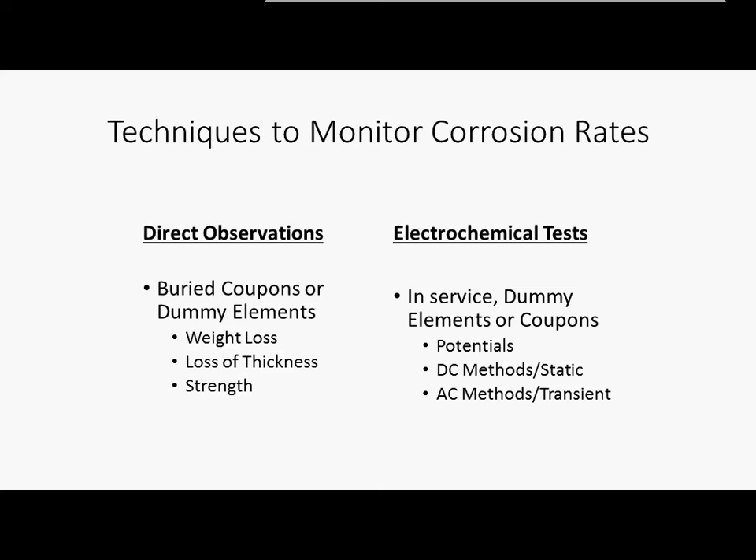These techniques have the advantage that you can continue to monitor a single sample time and time again because you're not actually doing anything to disturb or cause any degradation or destruction of the sample itself. So it does have an advantage where you can continue to monitor over time.

Of course, you have the disadvantage that you're often not getting a good look or a direct observation of what you're testing. So we recommend these days that there's still some direct observations done to confirm the electrochemical measurements and the results that you're getting from these non-destructive tests. Next slide, please.

The testing requires that we install either some coupons or dummy elements during construction, or we attach wires to in-service reinforcements or somehow retrofit an installation for an existing wall. The pictures that I'm showing here are actually coming from California, where they got into the practice of installing what they call dummy inspection elements into the wall during construction. They're relatively inexpensive to place, and they come out through holes that are cast in the wall.

They originally didn't put these in with electrochemical testing in mind, but since they do come through the wall face, we do have the ability to attach a wire to the end of the reinforcement and perform electrochemical testing, which is an advantage. Plus, these elements, as you can see on the right-hand side, can be extracted as well for direct physical observation.

So some of the more recent studies that have been done in California have been to take walls where they may have as many as 72 of these elements installed. They put them in clusters of 18, so they'll either have 2, 3, or 4 clusters, depending on how big the wall is. We can actually take electrochemical measurements on every single one of them and then decide on the basis of those measurements which ones you might want to extract and take a look at. So out of the whole batch of 70 or so, they may pull 2 or 3 for extraction.

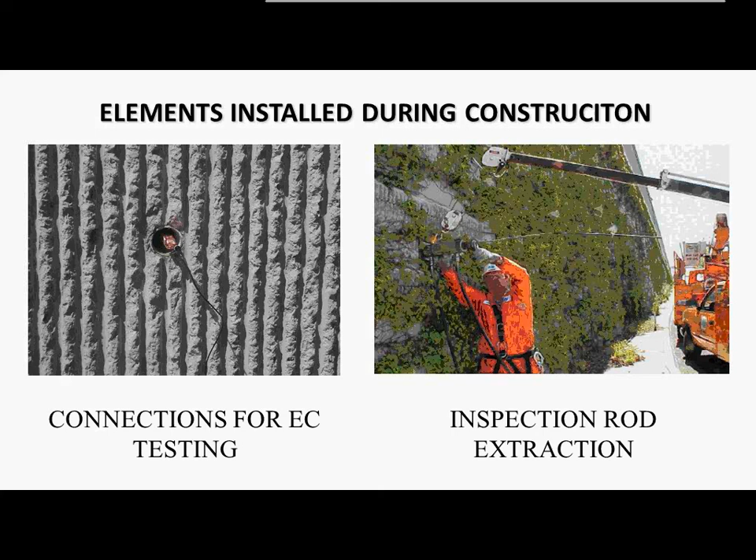And without getting into details, I'll tell you that extraction is not that easy. It's somewhat of a challenge. It certainly takes a lot longer than the electrochemical test. It's very worthwhile when you get an element, but I think without the electrochemical testing, it would be very difficult to get a lot of data from these elements.

Next slide, please. Hey, Ken, this is Matt. You have about 5 more minutes.

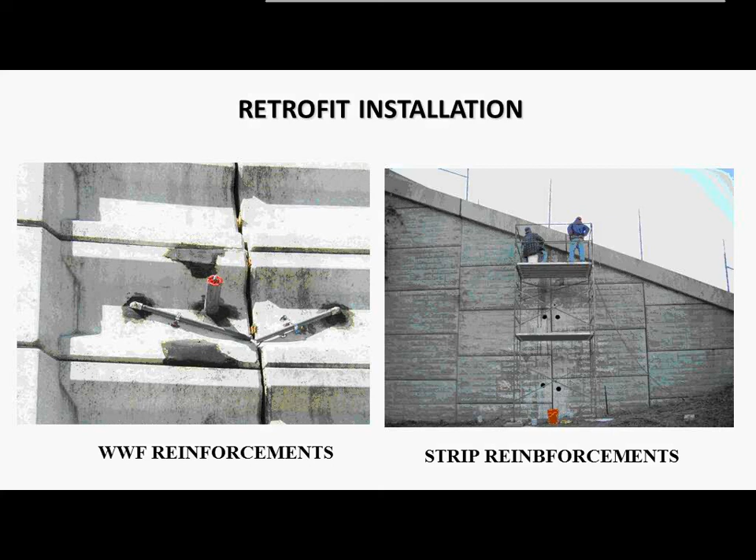Okay. Yeah, the next slide, this just shows how you might install elements in an existing wall. Often we have to core through the wall face or chip through the panels to access reinforcements, and we can use these same holes to install short coupons or dummy elements. Next slide, please.

And I think there's certainly a lot more work that can be done in this area. A lot of times when we put these in, we only read them once or twice, but I think on selected sites, you can get a lot of data if you can read these continuously.

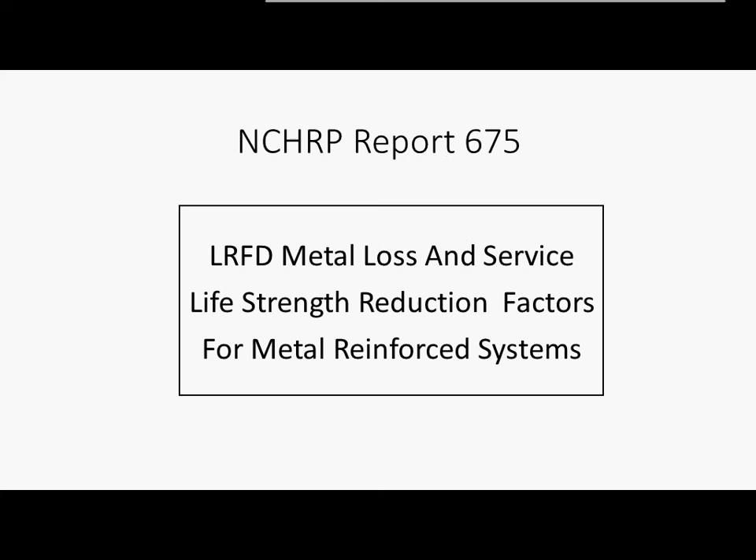Next slide, please. We have collected a lot of data from several states that have implemented these wired reinforcements for electrochemical testing over time. This includes California, Florida, Georgia, New York, North Carolina, and several others. And this was all done as part of an NCHRP study that's now NCHRP Report 675, and I encourage you to have a look at this to see some of the details of the data. Next slide, please.

But one of the things we did in this study was to group the data according to the character of the backfill. So we have some data that applies to what we're calling good quality backfill. This meets AASHTO criteria, but not by a wide margin, and other data that describes very high quality fill that does meet the AASHTO criteria by a wide margin. We see some differences in the performance.

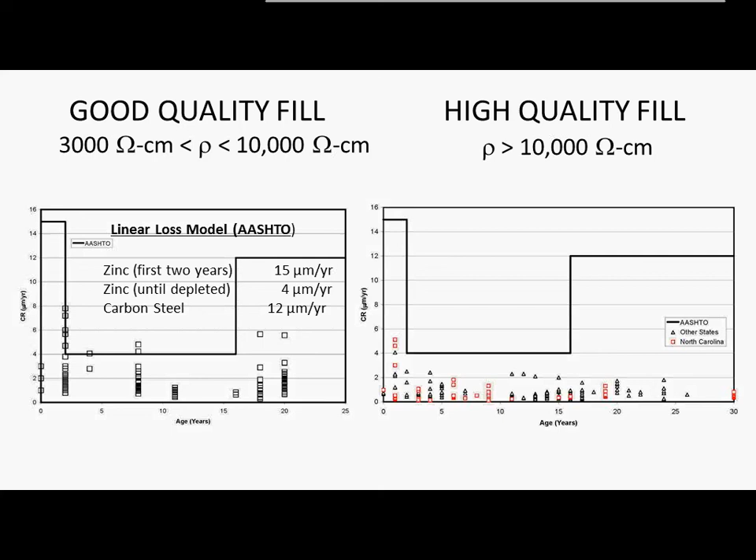Certainly, the performance with high quality fill is superior to the performance that you get with good quality fill, and the good news is that more than half of the walls built in the United States are actually constructed with high-quality fill. So we might expect better performance than we anticipated in the design from most of the walls that have been constructed in the U.S.

Next slide, please. So we need to take these data and do some type of reliability analysis with it so we can put this in a form that decision makers can use. Next slide, please. And there's a number of different ways to present these data.

One of them is just to look at the expected service life, which is the plot that I have on the right here, and I'm just describing the probability of failure relative to the number of years that it's in service. In other words, if something has been in service for 100 years, what's the probability that the reinforcements have lost too much cross-section? And this can be affected by fill type. So I've got some that are poorer quality fills and those that are the higher quality that I'm calling coarse aggregate fills.

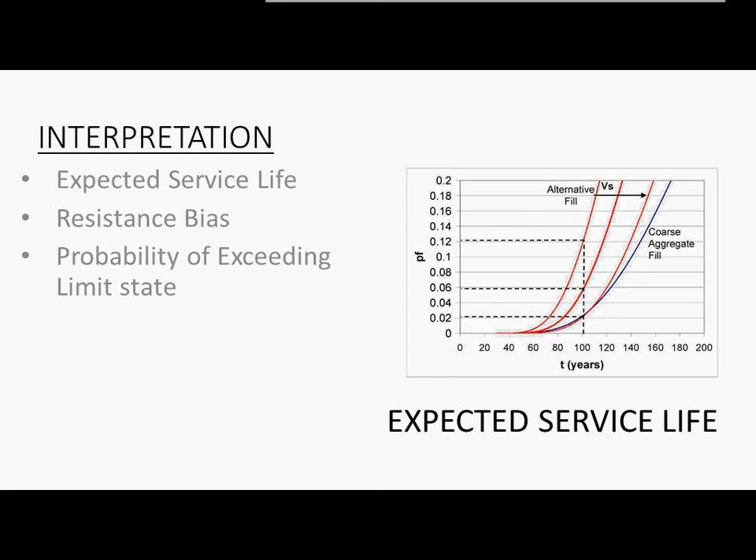And also, certainly, the metal loss model that you use in design can have an effect on your expected service life. So those red lines there are where we're actually using more sacrificial steel in design. And so you could actually take a poorer quality fill and get a performance that's similar to what you would get in a high quality fill if you add more sacrificial steel.

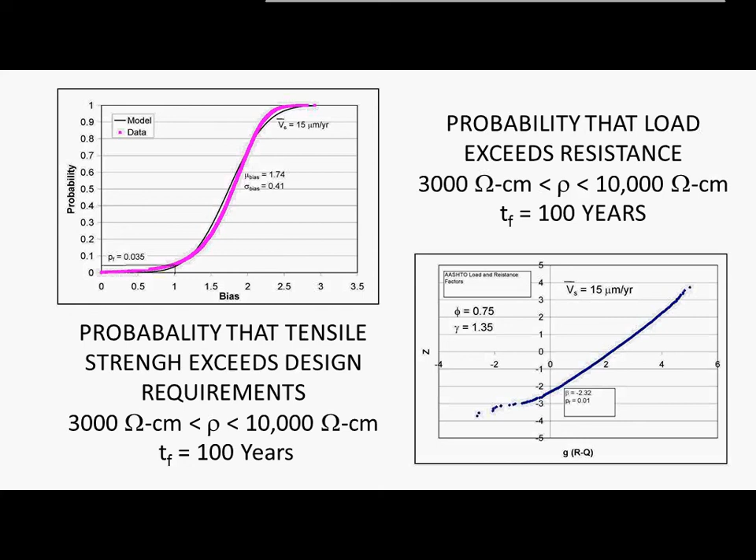Next slide, please. We can also look at the probability that the tensile strength exceeds design requirements. So we're looking at more than just the metal loss. We're also now looking at the variation that might be inherent to tensile strength. And then finally, something that is done in load and resistance factor design, we can look at the probability that the load might exceed the resistance or vice versa, basically looking at what resistance factors we should use in design.

Next slide, please. So I think there's a number of applications of the data that we can use for management. We can manage risks. We can do a lot of work with life cycle cost analysis. This feeds into management decisions and also what we should do towards the end of the wall life. And finally, next slide.

I think there's a lot of utility of the data for asset management, particularly when it comes to life expectancy. We may be very interested to know that many of these walls may actually be serviceable well beyond 100 years. Certainly not all of them, but a large segment of the population may be in that category.

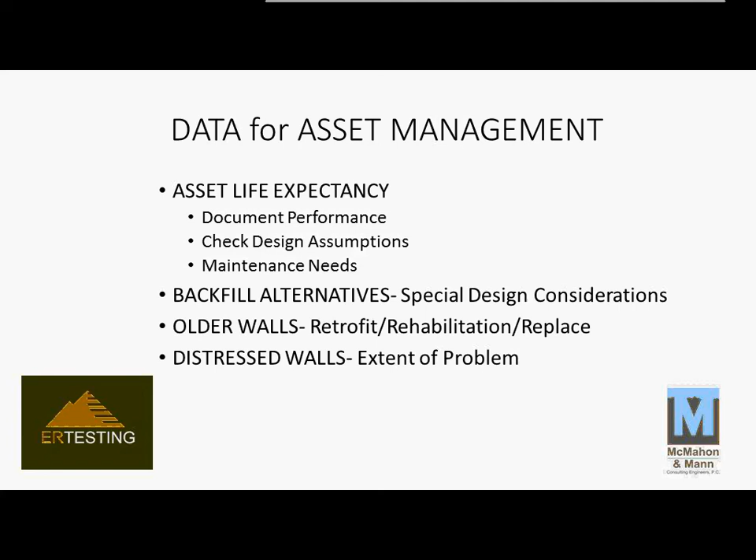And there are some other what I think are management objectives or decisions that can be made in terms of selecting backfill sources when you're in the construction stage and trying to have some more control on that, and really what we're going to do with older walls. And when you do have a distressed wall, is it the whole wall that's distressed, or can we define just a certain portion of the wall that might need to be rehabilitated? In other words, what's the extent of the problem?

So the first one, I'll just go down the list here. The first one is from Wyoming DOT. I'm not sure which presentation this referred to, but in Colorado, for the AVR calculation, it uses crashes and sight distance. Are crashes only ones identified as involving rock fall, or are other crashes included? Also, is the sight distance a field estimated number at the rock fall location, or is it highway geometry driven? I guess that one's for Ty from Colorado. I can repeat that if needed. Are you still on the line, Ty?

Can you guys hear me? Yeah. Yep. So the sight distance was done by AASHTO Green Book determination, and it's done by the guys taking the rockfall hazard rating system field data. So they put the object out on the corner, and they kind of walk up. We don't walk down the middle of the road. We walk along the side of the road so you can see it, and they measure that distance.

The crash, the accident data, it comes from our Colorado State Patrol, and they have two tags for accidents specific to rockfall. One is rock on road, and one is rock off road, and only those two tags from the Colorado State Patrol are taken into consideration for accidents.